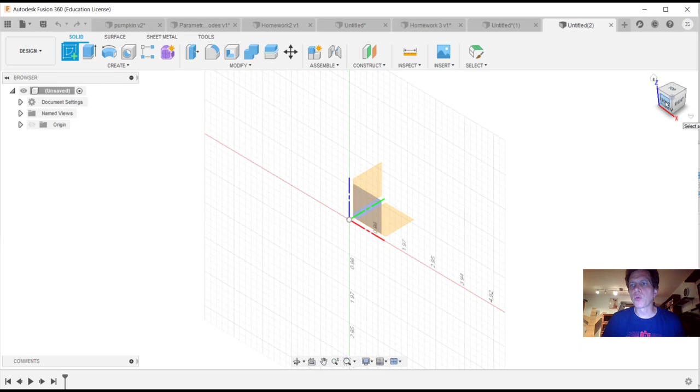So we're going to start as usual by creating a sketch. I'm going to work from the front here. This particular assignment, it's very important to know from what direction you're looking because we will be making sketches on multiple planes. So I've sketched this out ahead of time on paper, so I have a plan and I kind of have an idea of where I'm coming from.

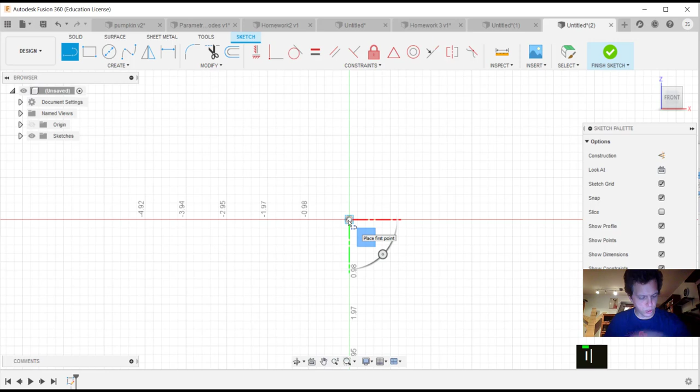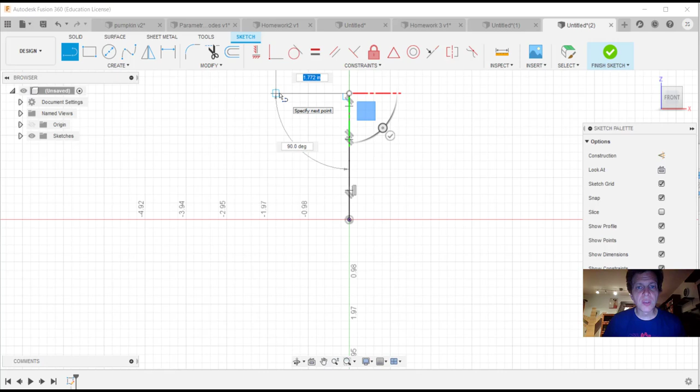So I'm going to make a line, L for line, and then the first point is going to be at the origin. I'm going to come up and make another line in line with this, and we're going to hit click again to make another one more time, but now we come 90 degrees out. I'm not worried about dimensions at the moment, but I am being careful to keep things collinear, and in this case I want this to be perpendicular.

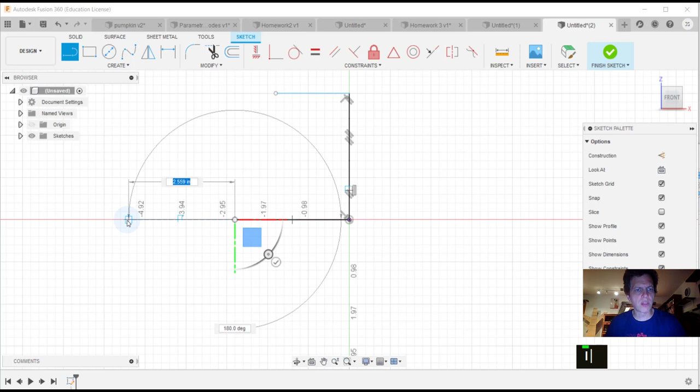Okay, so now we make a line from the origin along the x-axis. I'm going to come out to about here. We're going to make another line out to here, and we're going to confirm that. And now I'm going to dimension everything.

Normally we would use parameters for this, so we could make adjustments later. But since I will be working with splines and sweeps that can break if you give the wrong parameters, we'll work with numbers that we know work for now, and then you can suffer the indignities of having stuff break later. So I'm going to dimension that to 5. And this one I'm going to dimension to 8.

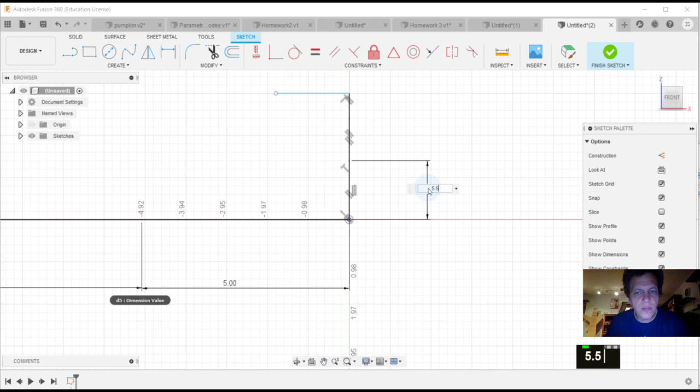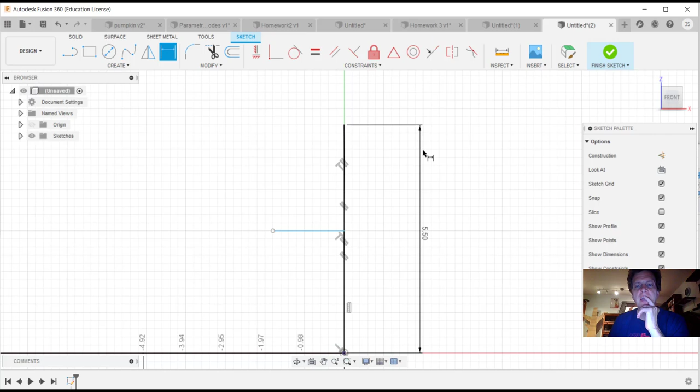And now we're going to come up from the bottom here, and the one that I have that works here is 5.5. Back out, scroll down. Now notice something. My points over here have been superseded by this 5.5 here. So if you find yourself in a situation where, because you've changed the height of this, everything else didn't move with it, you can undo and then start from the other side.

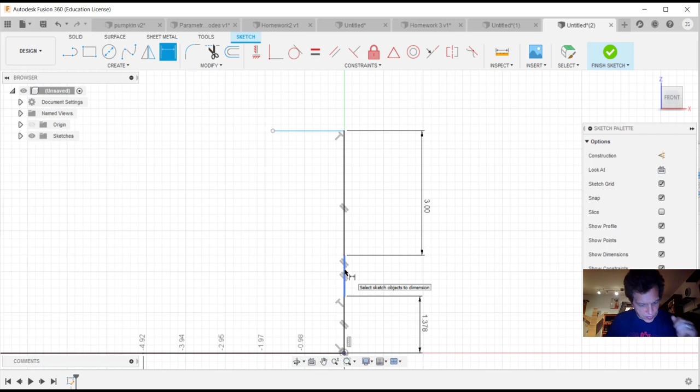So instead of starting with this one at 5, I'm going to dimension this one at 3. And this one at 1. And then this one at 5. And that way it all stays in a line. If I do this one first, it's possible for it to extend past these. You can just drag them over when you're done, but if you see that happening, that's what's going on.

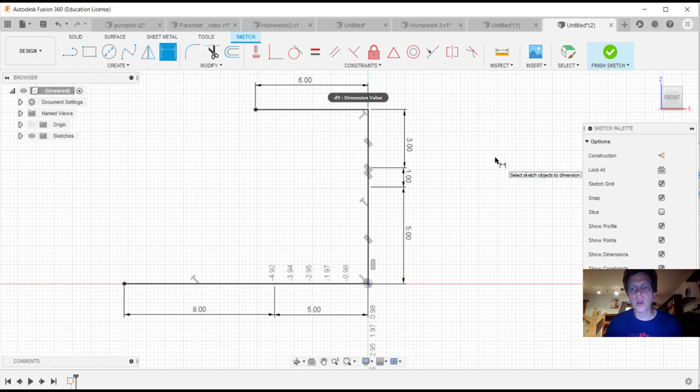All right, so now I'm going to dimension this one to 6. And I believe for the moment that's what we need. All right, so I'm going to get out of that tool. We're going to create a pair of splines here. And, oh, wait, before we do the splines, my apologies, we are going to mirror this.

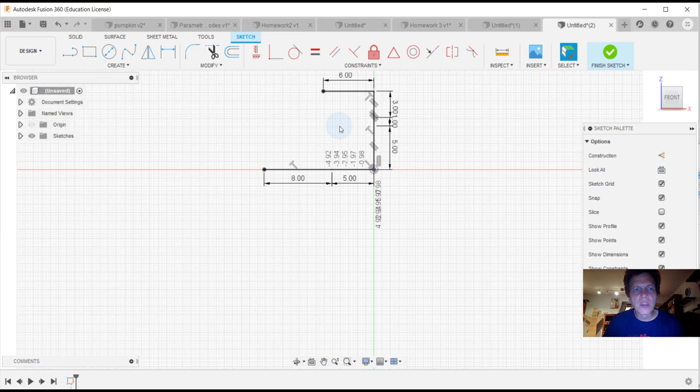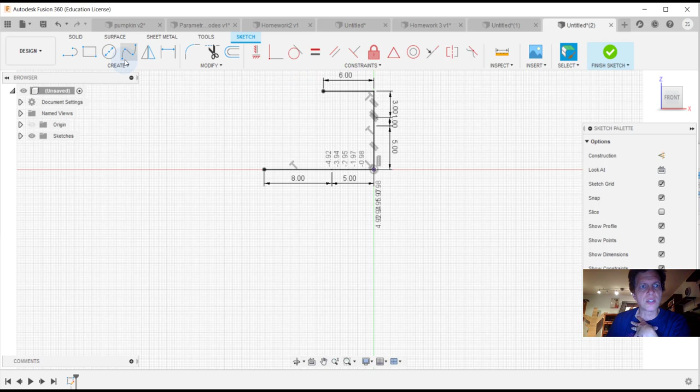So this is going to be the top profile of the pumpkin here. But I want the full profile. And instead of trying to mirror the splines, I am going to mirror the whole thing. But before I do that, I am going to, nope, actually I'm just going to go ahead and do that. So this tool right here, Mirror, allows us to select all of these points here. Oops. All right, there we go. Selecting the points. Mirror to here.

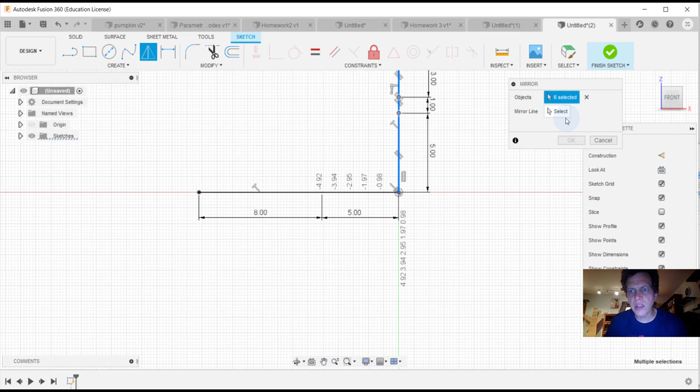We have 6 objects selected. For some reason, it's not selecting this one, and it selected this one instead. So I'm going to shift-click this, and then click on that one. So now I have my 6 selected. My mirror line is, oh, that's why I did that. And so now I've got a mirror over here. I don't have to dimension these because the mirror takes care of that. So I'm going to hit OK.

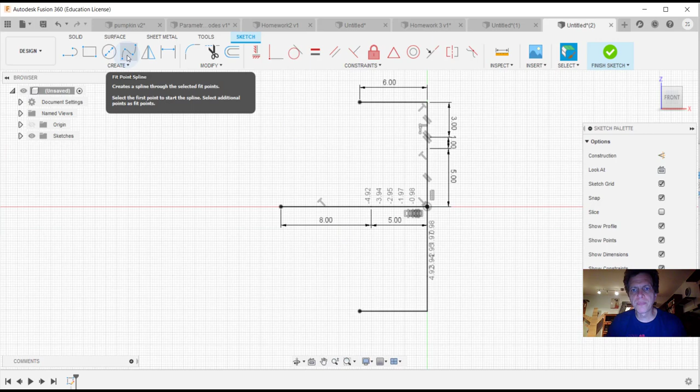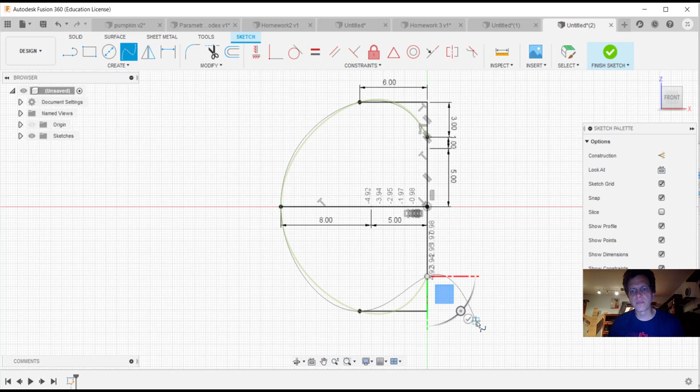And then what I'm going to do is I am going to make my splines. So fit point spline is what we're after. I'm going to start at this point here, the one just above the 1, single click. I go out to here, single click. I'm going to go out to here, single click. Out to here, single click. And then we're going to find that point past the 3-inch mark here. So that's the halfway, and see that square? That's our line. So we're going to hit OK right there.

And this is the point I realized that I missed one of my guidelines, so I'm going to hit L for line. And this top one right here, I'm going to come out 1.5 inches. And I'm going to repeat that down here.

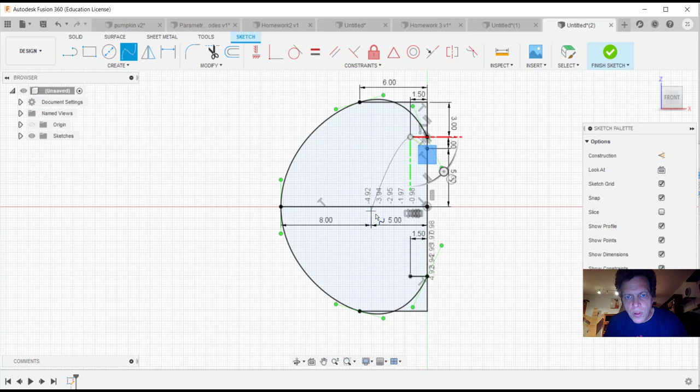So now I can make another fit point spline, and we are going to start from this one down here, the one below the 1. 1, 2, 3, 4, 5. Okay, and then we'll finish that. And so now we've got 2 splines, and this is basically our pumpkin profile.

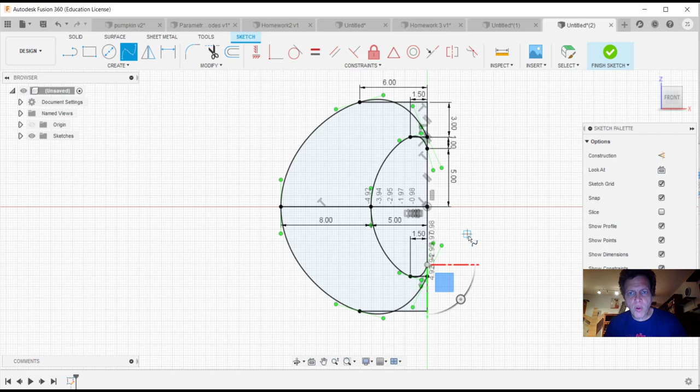So before I do anything else, I am going to get out of the spline tool with Escape, and I'm going to turn these into guidelines so that they're not in our way later. I'm just selecting them and hitting X.

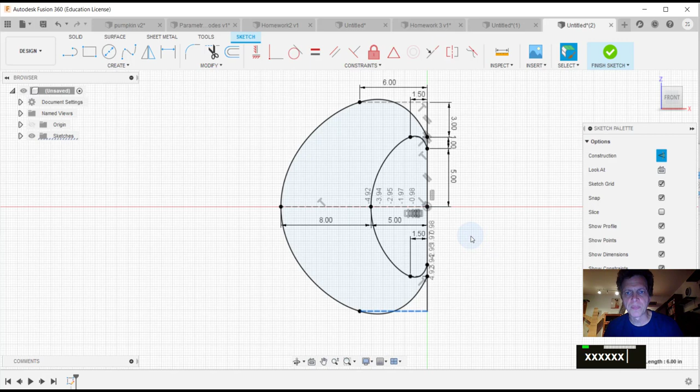Could have done this at any point. I could also do this with any of the rest of them, but these aren't necessarily going to be in our way, so I'm not too worried about it. Okay, so I'm going to finish this sketch. And here is our basic profile.

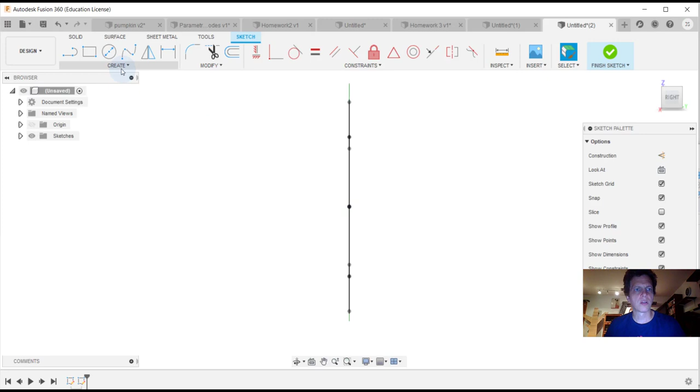Before we can turn this into a sweep to create dimension, we need to give ourselves a profile for the sweep. So I'm going to create a new sketch. And we are going to work from this plane right here. But I'm not going to use the normal center point circle tool. I'm going to use the 2-point circle tool because what I want is a circle between this point and this point.

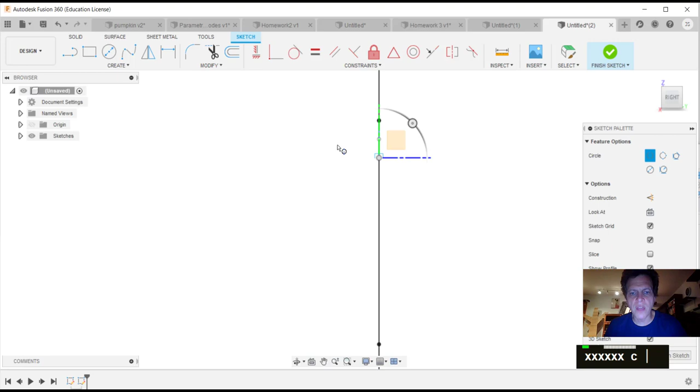And that was not the circle tool. So we are going to back up. And we are going to create a 2-point circle. And we're going to select this plane. And we're going to go from here to here. This is the spot on that line, our reference point, that just has a 1 inch.

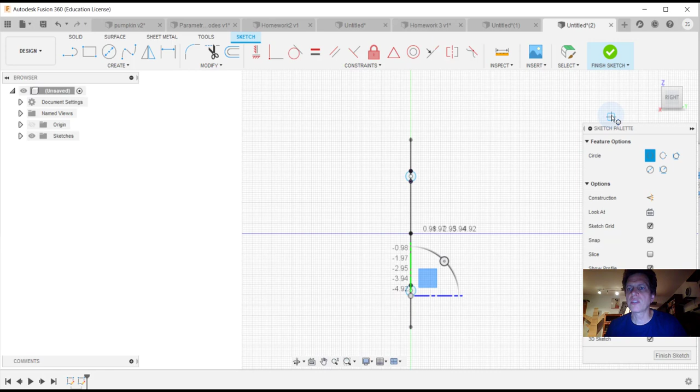I'm going to do the same for the bottom one here. Although it isn't entirely necessary, I'm doing both just in case I change my mind whether I work from the top or bottom. So we're going to finish that sketch. And now we have our references for the pumpkin body. So create sweep. What we want is path and guide rail. Usually single path is standard, but we'll work from path and guide rail.

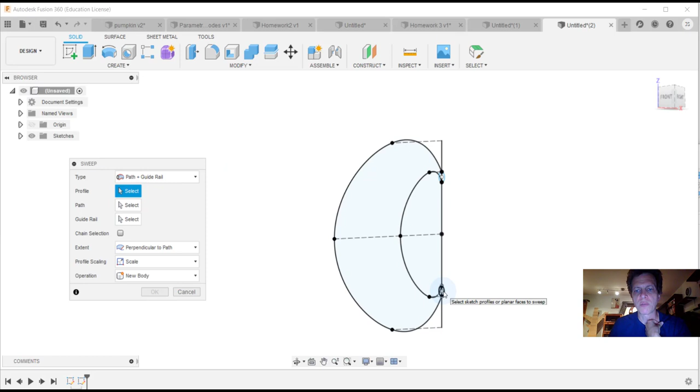And we're going to select the profile. The profile is the shape that you want to create the sweep from. We want this sweep to be a circle. We want the path to be this inside spline. And we want our guide rail to be the outside spline. It is going to adjust where it says here, perpendicular to path. And then also we want it to scale as it goes in and out of the guide rail.

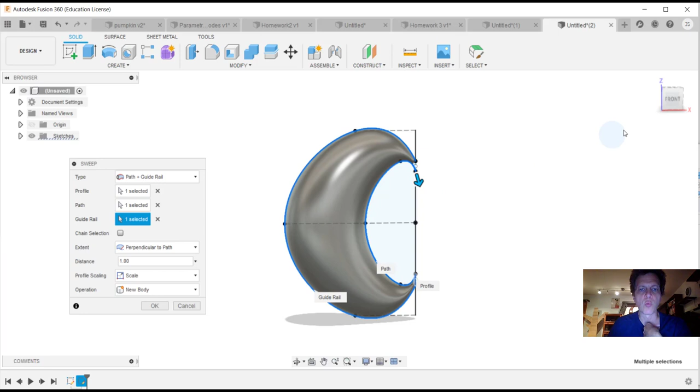You'll see that it scales that circle out to the guide rail. And what this does is that it gives us this radius out here being larger than this radius at the top to mimic the shape that pumpkins have. All right. One more thing before I get out of this. We do indeed want it to be a new body.

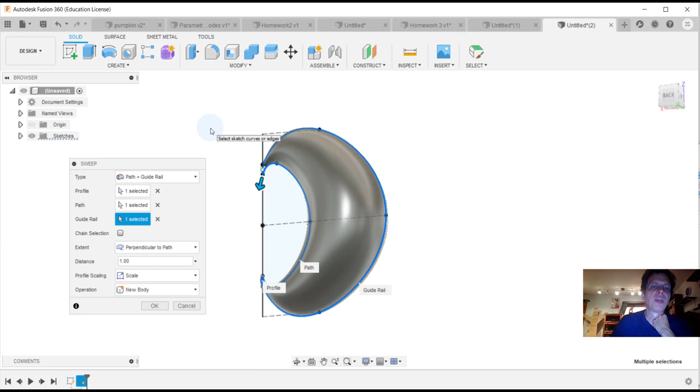And be careful with chain selection. What this will do is when you select one part of a spline, it will select everything in a line with that spline. In this operation, it will cause problems, so watch out for that. All right, I'm going to hit OK. We now have a new body here. I said new body here. There we go. So what we want to do with this body is we want to make it pumpkin-like.

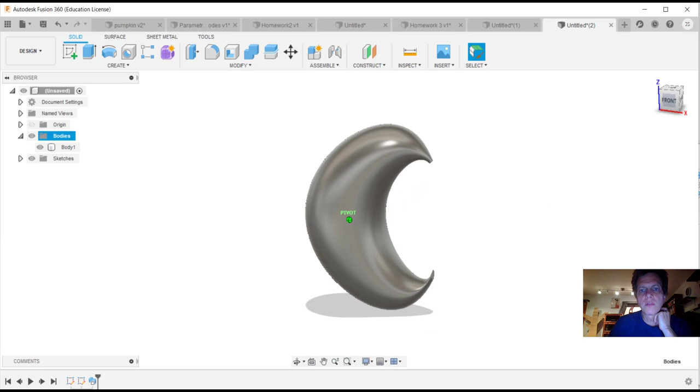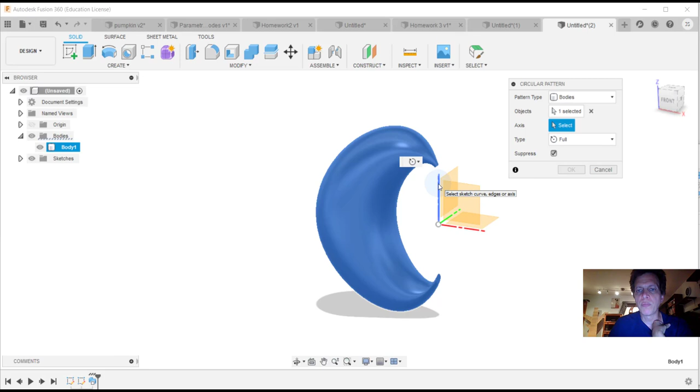And so what I'm going to do is I'm going to create a pattern. Create pattern is here, and we want a circular pattern. We're going to select the body that we're working with. So object select, there it is. The axis, this is around the point at which you will be copying all of the pattern of the bodies that we've selected.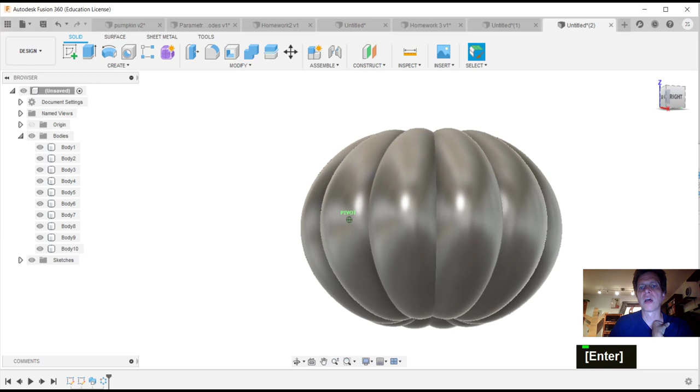And 3 isn't quite a pumpkin, but if we kick this up to 10, we now have something very pumpkin-y, you know, a little on the perfect side, but keep in mind that you could also make the number of lobes parametric, so instead of typing in 10 in the pattern menu, I could have typed in number of lobes, or NL as I had in my parameter stage.

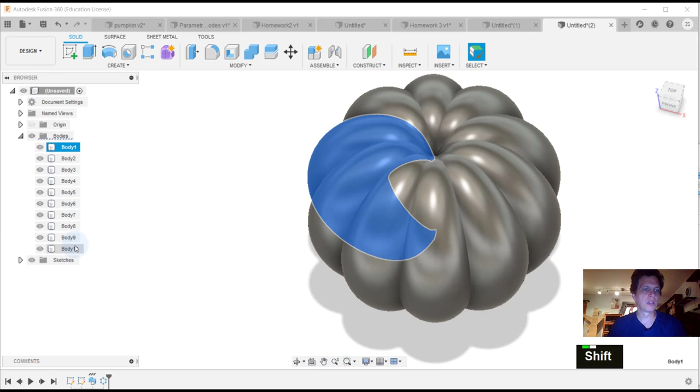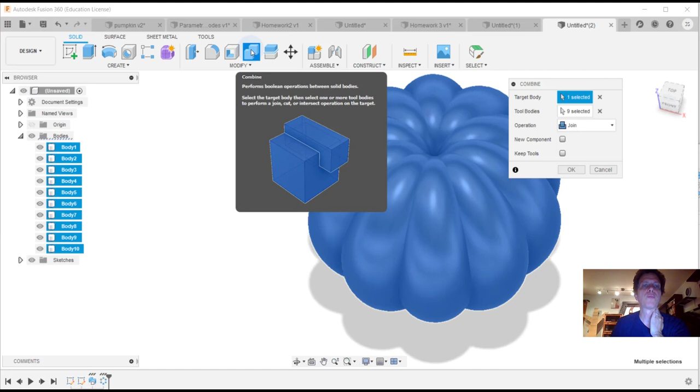This is a little on the messy side, having all these different bodies. So what we can do is select them all, and we can combine them. If this isn't up here, you can find that in the Modify menu. And it will take a moment. It'll ask you what you'd like to do. For any of the Boolean options, those are the ones where you're either adding, subtracting, or overlapping. It wants to know what the target body is and what the tool body is. It really doesn't matter for this particular one.

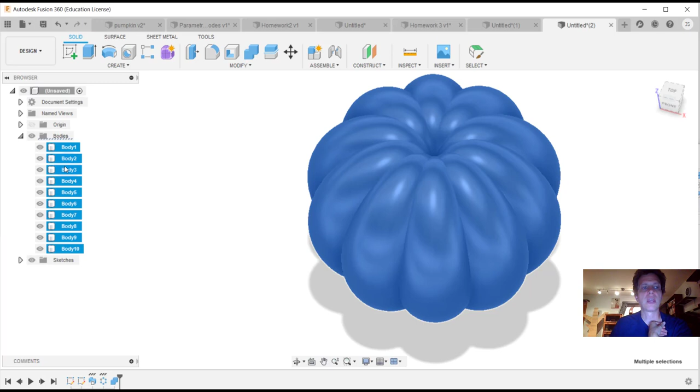And with subtract, it makes a big difference. What you can just remember is that the tool body is what's being cut from the target body. So if you want to subtract, select what you want to subtract from the object second. But since we're joining, it doesn't matter. We're not making a new component. We're just combining these. I'm going to hit OK, and it will take all of these bodies and convert it into one. And it's a little easier to deal with.

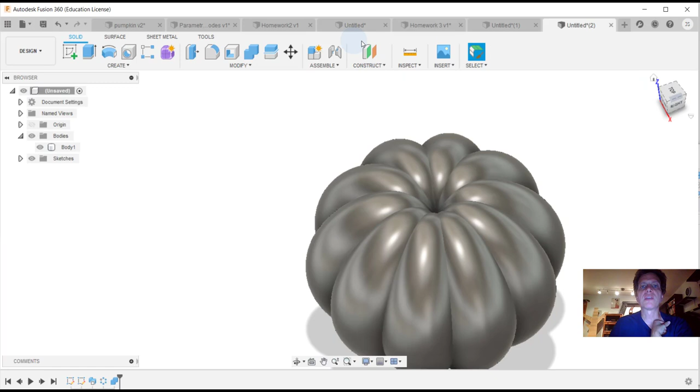And you'll notice now that when I try to select over that, it's giving me faces rather than the whole body. Okay, pumpkins need a stem. So we are going to go to construct. This allows you to create construction planes, construction lines, reference points, things that you want to use as anchor points for your sketches and so forth.

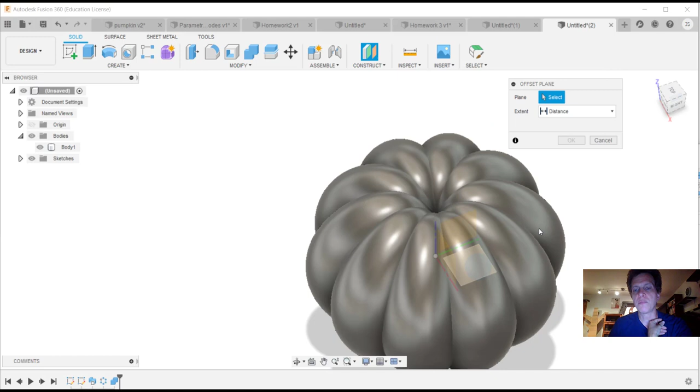So we're going to make an offset plane here, and we want the plane to be parallel to the top plane. So we've selected the plane, but now we need the distance. And there's two ways we could do this. Well, there's three ways really. We could just drag it to what looks good. We could type in a distance, or we could actually say we want to go to an object.

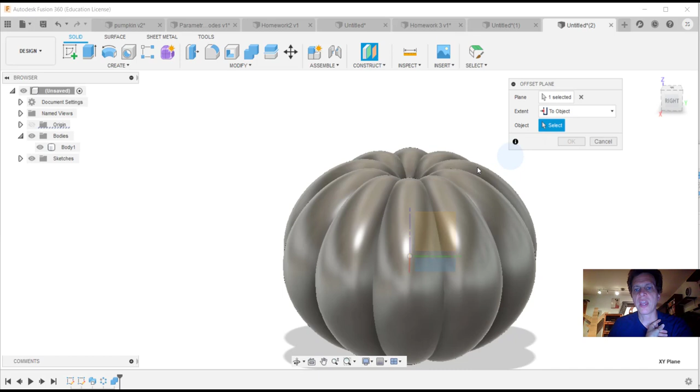And what we have, if I turn off the bodies and turn back on the sketches, well, maybe we need to change our viewpoint here. So if we go back from the front, let's make this plane from the top here.

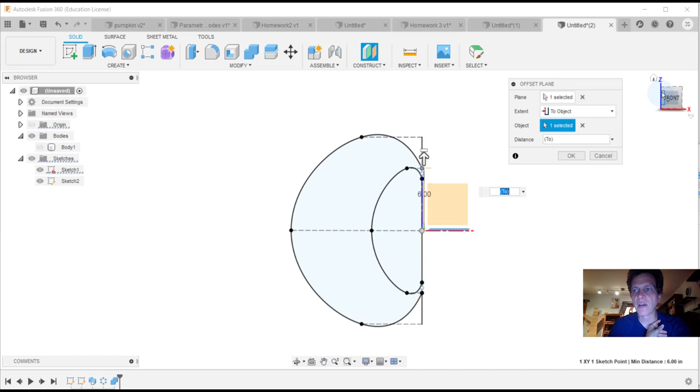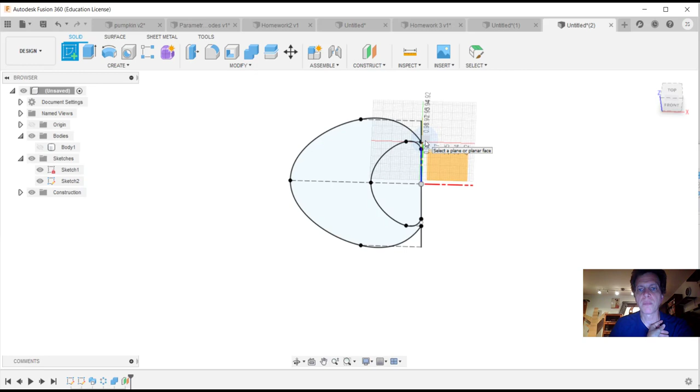And now we have a reference plane at that point here, and we can start to sketch to it. So I'm going to hit OK. And we're going to create a new sketch. All right. So of my options for planes, I'm going to pick this one that I just made up here. And now I can draw on that.

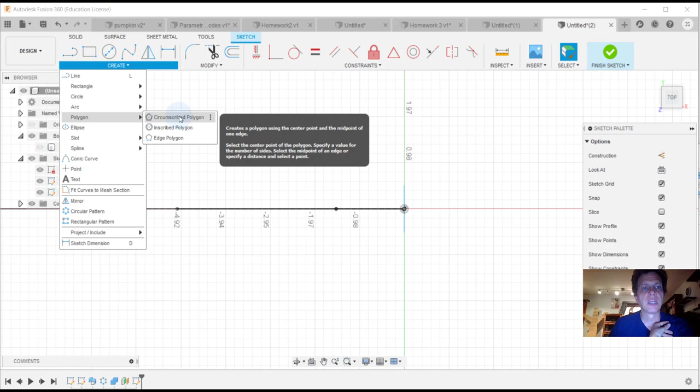I'm going to go from the top, I'm going to zoom in, and I'm going to show you a new tool. We are going to create a polygon, and we're going to do a circumscribed polygon. This is a polygon that fits on the outside of the radius of a circle. Inscribed would be within that, and then edge is the length of the edges. But we want it to be from the middle

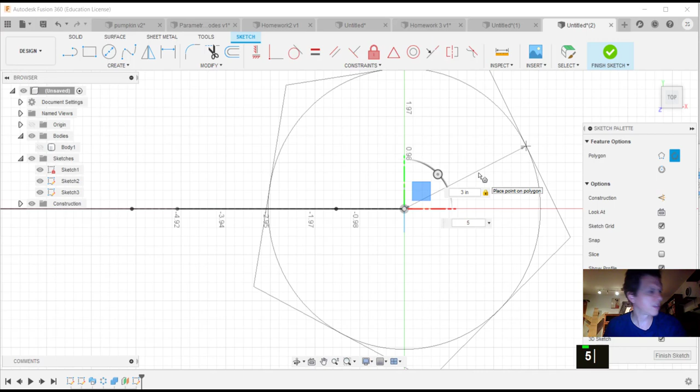out, and I'm going to say that we want 3 inches. And I'm also going to say that we want 5 lobes. If you look at a pumpkin stem, the one I have anyway is a pentagon. All right, but those corners are a bit sharp.

So what I'm going to do is, this is another thing that I have not taught you yet, is fillets. We can change these from being sharp corners to rounded corners. So if I want to fillet, I can go from one to the next, and we can type in a radius so that you can define how soft you want it to be. I think 1 is just fine here.

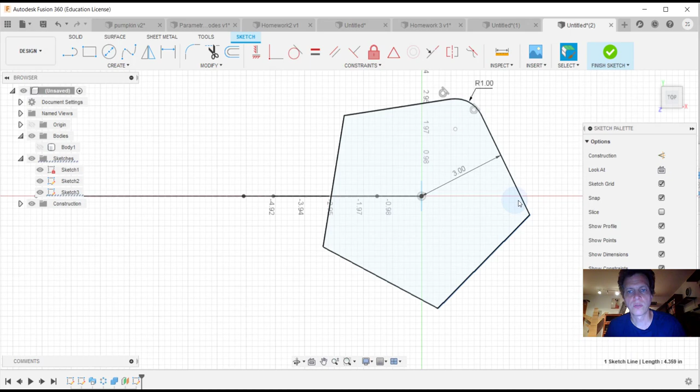And so I'm going to do that for all of these. So fillet, this one and this one, enter, this one and this one. I guess it wants me to select fillet for each one. First line, second line, enter. All right, so now we have a rounded pentagon.

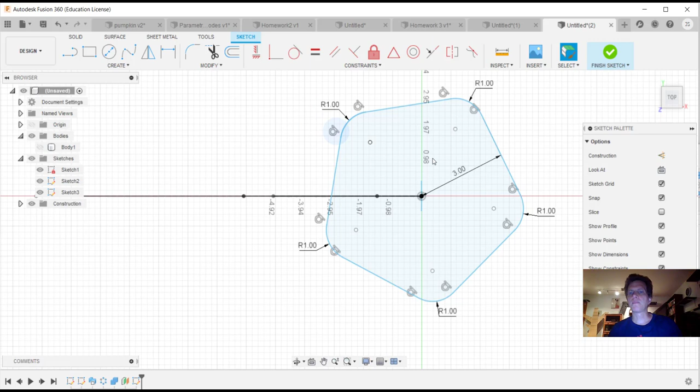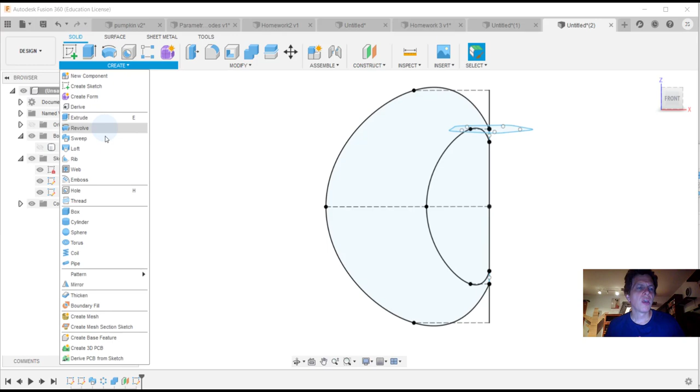We're going to finish sketch, and we are going to take a look at that. That is a rather large stem at the moment, but it won't be quite that large as we continue. So I'm going to make yet a new sketch. We could have rotated and worked from the same one, but it can be kind of tricky to keep track of what face you're on, so I'm going to click this face here.

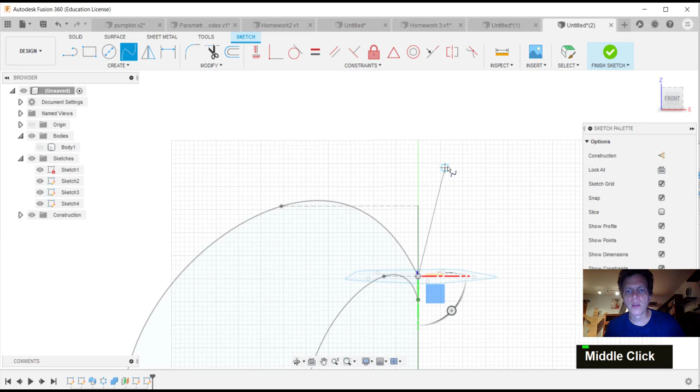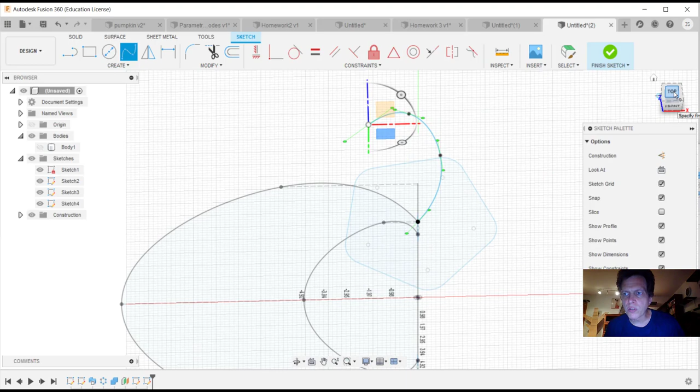And I'm going to be making splines from this center point here. So fit point spline, and I'm going to just freehand an approximation of the curve of a pumpkin stem. You have a lot of freedom here, and anything that works is fine. But then I'm going to make another one, and I'm going to do my best to be from, if we go straight from the top, we want to make sure we're still on this axis here.

So, yeah, there we go. See how this line pops up right here? That's what we're looking for. And I want to be out to the edge of the pentagon here. And I'm going to come up. I'm going to come over. And then I'm going to roughly follow this curve here. All right. And then we'll hit OK.

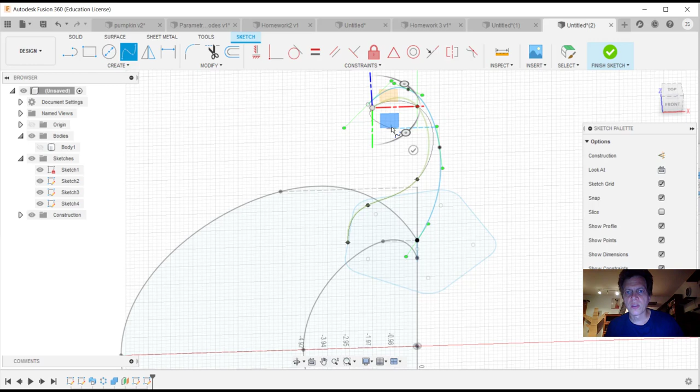The exactness is not necessary, but you can kind of get the idea that this comes through the center of the pentagon, and this comes from the edge of the pentagon, and then we'll finish that. So now we have our stem form, and we can create another sweep from that, and we're also going to use path and guide rail. So our profile is the pentagon, the path is this one here, and the guide rail is this one here.

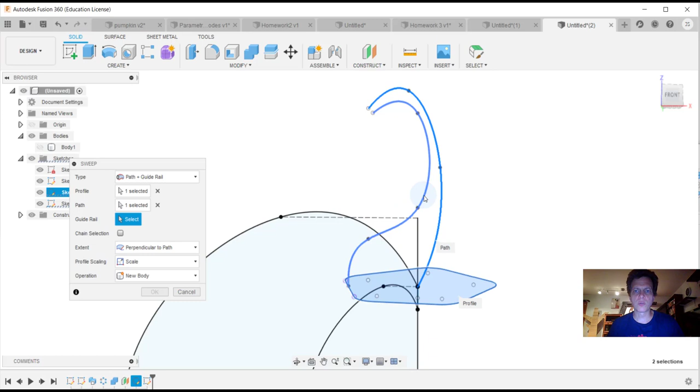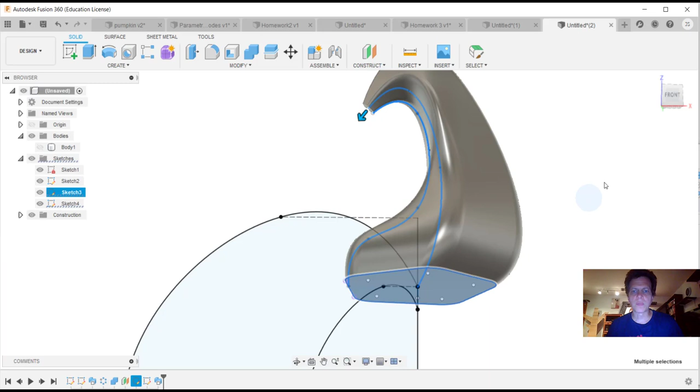And so now we have, oh, this is also important, new body. It might default to a cut or an intersect or a join. Join would work too, but let's just go with new body. We can join them later. And now we turn it all back on, we have ourselves a pumpkin.

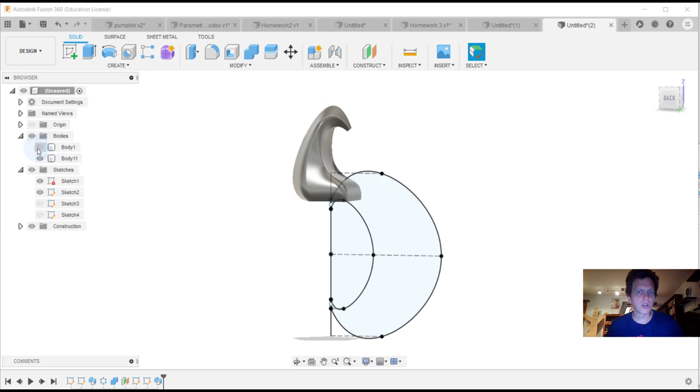If you're not happy with the scale of that, which this one's looking kind of dopey, I'm going to go back to the sketch that defined that. Maybe turn everything else off. We'll edit that. And we'll bring this in just a little bit. Maybe something like that.

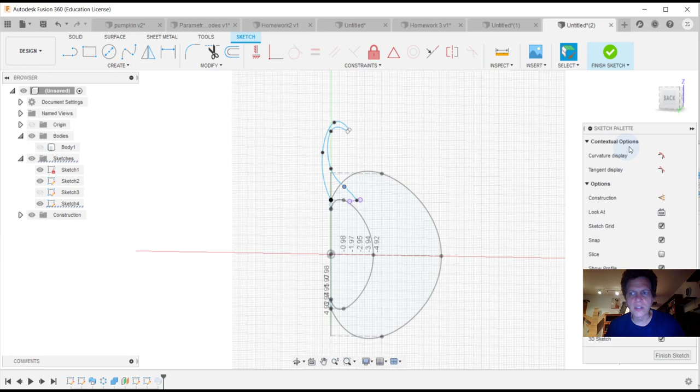Keep in mind that when it does this, it's making one on the opposite side, and so that will swing out from the wide end. So when I hit Finish Sketch, it should automatically make an adjustment to this operation as well. So if you look down here, we have our sweeps, we have our sketches. When I made my adjustments here, it backed up and then reapplied the sweep with the new settings.

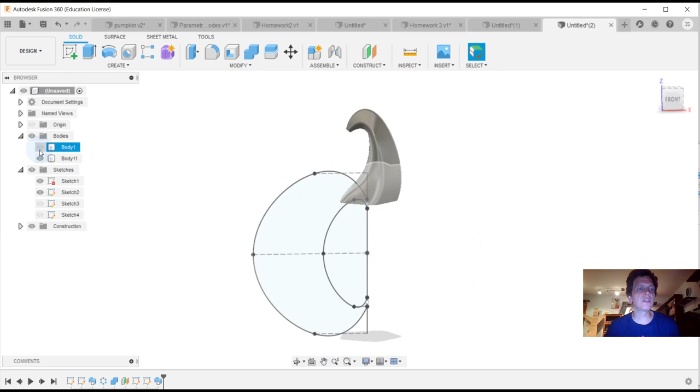Now, if the new spline that you created isn't compatible with the sweep function, you will get an error message, and then you'll need to make some corrections. And the normal failure modes for a sweep are usually that your splines are not connected to your profile in a way that allows it to interpret it correctly.